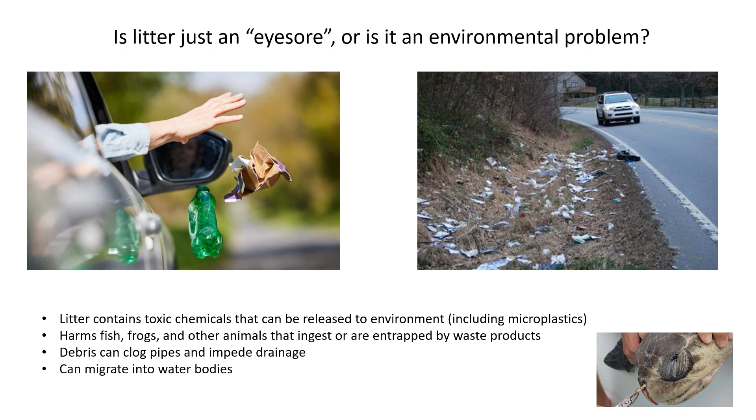And so for all of those reasons, we'd just rather that trash not be floating around in the environment. It's better if we gather it together and dispose of it in a sanitary way that's consistent with best practices in environmental protection. So the first question when we are doing the engineering work of solid waste is, how much is there going to be? And there's a range of how much solid waste people generate on a daily basis.

Here in the United States, we are known for generating a lot of trash. The United States generates a lot of solid waste. A lot of the Gulf countries in the Middle East, which are pretty consumerist societies like ours, also generate a lot of solid waste. And then at the other end of the spectrum, societies that are really rural, like developing countries in Africa, or countries that really emphasize recycling, like Western Europe, would have lower solid waste generation.

Places where they sort recycling, and they're just in the habit of using fabric shopping bags rather than disposable plastic bags. And when you travel abroad, you sometimes notice that paper towels aren't the same thing like they are here in the US. The idea of having a paper towel to wipe down the counter is just absurd to people in a lot of countries where they just use a reusable cloth towel, and so they generate less waste when that's the case.

So what this figure illustrates is, for the population of a city, here on the horizontal axis, the amount of waste that's being generated per day. And this figure is in SI units. So you can see the midpoint of solid waste generation on a per capita basis is 2 kilograms per person per day. And they say that usually it varies from 1.5 to 2.5 kilograms per person per day. And at the low end, you may have as low as 1 kilogram per person per day and as high as 3.

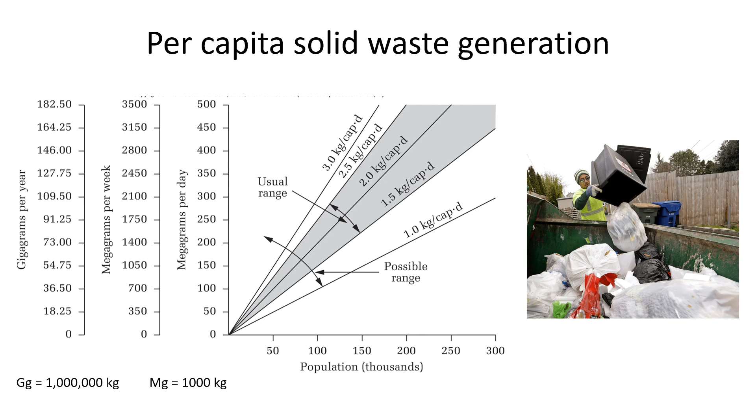So the amount varies, and for problem solving, you'd usually just be given some assumption: assume that the people in your town generate X kilograms or pounds per day. But what can influence that is how closely people are adhering to what's known as the waste management hierarchy. And this is something that comes off of the EPA website, a mindset of what's the best thing that we could do for the environment and for society when we're faced with managing solid waste.

And the best thing that we could do would be to reduce the amount of things we use that generate waste. So for example, sometimes you'll order from Amazon and it'll just come in a very thin plastic bag instead of a big bulky cardboard box.

I think they're starting to make more of an effort to minimize the amount of packaging that goes into shipping their materials. And sometimes they even have what they call frustration-free packaging. And that's where in the past maybe it would be common to have a big bulky, hard to open plastic blister casing, as they call it, for things like batteries or electronic items. Now they're just sealing it up in a very thin, minimalist paper or cardboard coating that doesn't have as much packaging on it. It weighs less.

So the best thing to do is just minimize the amount of waste that is being generated to begin with. And this should sound a lot like the mindset that we brought into pre-treatment for wastewater. The best thing that we can do is reduce the amount of water that's going to the treatment plant to reduce the occurrence of problematic chemicals that may interfere with the treatment process. It's cheaper to prevent the problem than it is to deal with the problem once it's been created.

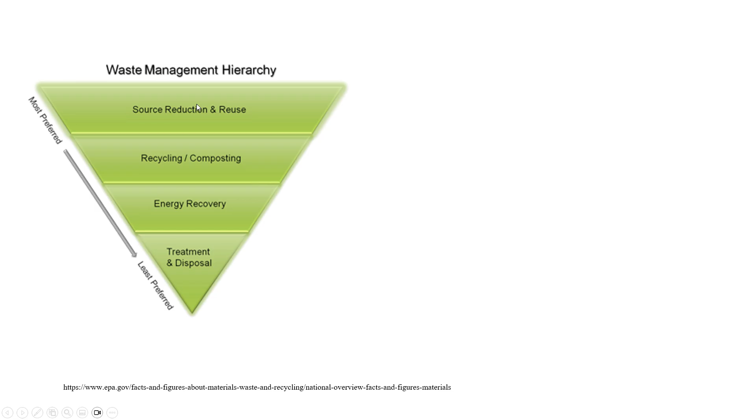So all of those are preferred before we simply throw something away and have no further use for it. So treatment and disposal, you can see, is at the bottom of this list of options. And hopefully the relative areas here indicate the amounts of each of these. It's just qualitative, not an actual true percentage, but it's better if we have a small amount of things being disposed of, and most of the waste that we would otherwise be landfilling can be prevented through using less packaging, reusing items that aren't completely destroyed yet, and so on.

So this is how things are going. The United States is a bigger country now than it was in the 1960s. Every year our population has been going up so far. Because the number of people has been going up, the amount of solid waste being generated has been going up. But it is slowing. The population of the United States in 2018 was a lot higher than you might expect, just based on the relative magnitude of this municipal solid waste that's being generated. But this figure also shows how much of it is going where. So recycling gained popularity over the years. Composting has gained popularity.

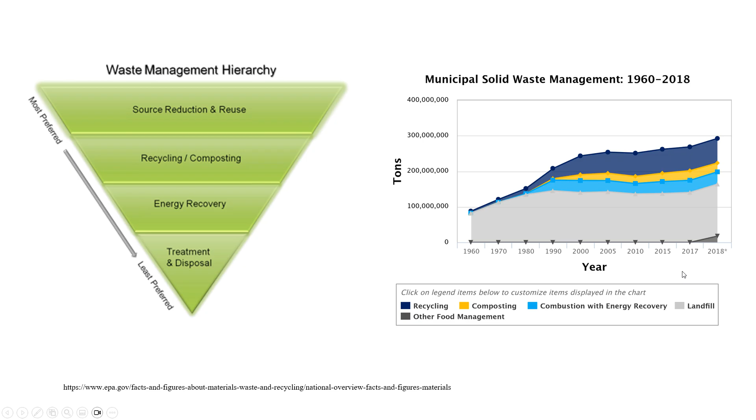Combustion, but still landfilling is the majority of where the solid waste is going. Because it's easiest. You know, I don't like to sort recycling. And actually, they don't do recycling where I live. Some cities have it. I live in a rural area. There's no recycling. So if you want to do recycling, they don't come to your house. You have to track somebody down who will take it.

And it's getting increasingly difficult. We'll talk about that in a minute. But metal has the most residual value out of all the things that can be recycled, and it's still relatively easy to recycle metal. But the other things, you kind of have to almost fight your way into the recycling center to get rid of them.

We sometimes use garbage, trash, solid waste, all those words interchangeably, but they don't mean the same thing. There are technical definitions. So for example, garbage is talking about things that can break down because it's putrescible. That means it's organic. It can rot. So garbage tends to have higher moisture content because it's organic in nature.

And garbage is maybe the most dangerous if we leave it uncollected, because it's going to attract rodents and other vectors that carry diseases. So cockroaches, mice, rats, stray dogs. We don't want them to be spreading disease, and so that's garbage.

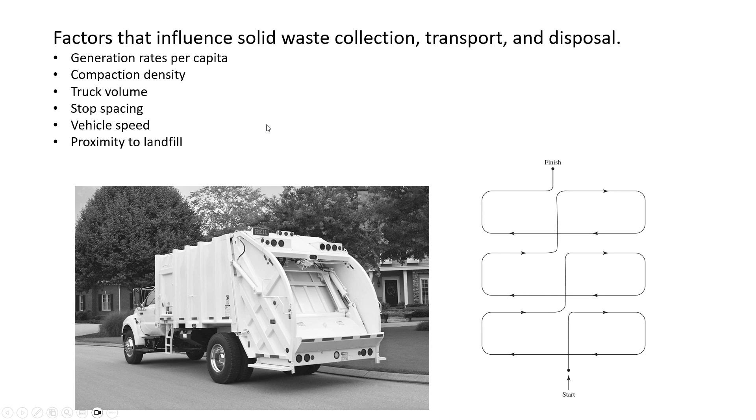Sometimes there's like an intermediate location where they'll dump their trash to be sorted and repacked later, and then they'll go back into the neighborhood and begin collecting again. Taking into account the speed that the truck is driving, any delays that they may encounter, like traffic delays, the amount of time it takes them to unload the waste, and even the number of breaks that they have and how long their breaks are.

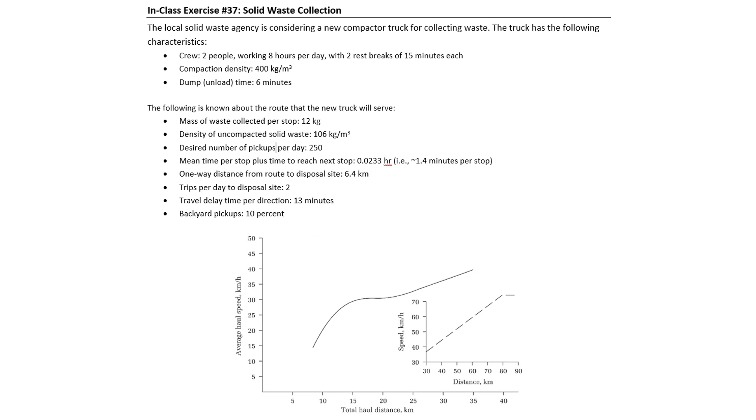So we're going to start off here in this example defining the variables. And so there's the list of variables here. I'd like you to read through the problem statement and assign the number to the variable for each of them. And then on the back side of the paper is where you're going to determine the volume per pickup, the compaction ratio, the volume carried by the truck for each trip to the landfill, and so on.

So I'll pause. Of course, you're free to interact with each other. You don't have to be quiet as you're working on these in-class exercises. You can check your answers and collaborate and everything. But we'll take a few minutes to go through this and then check the calculations together.

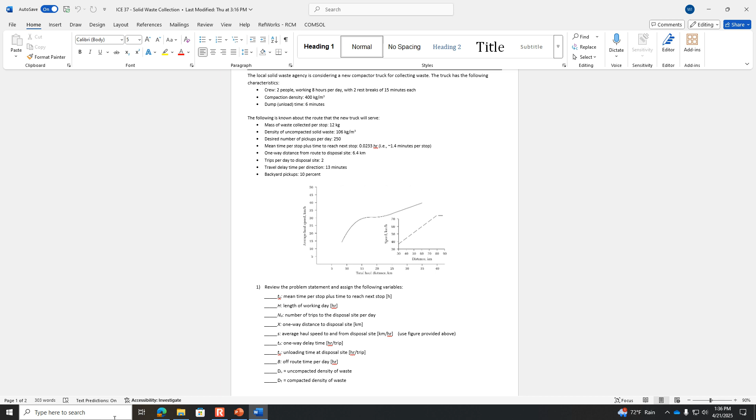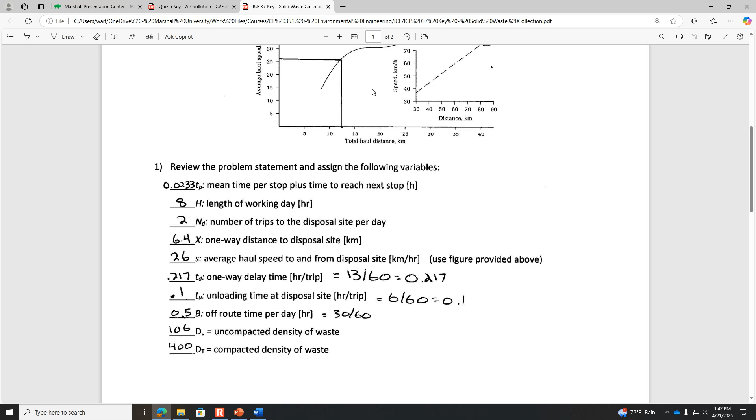Okay, so just setting things up for the equations. Here I've got the variables defined, well, the numbers associated with the variables if you want to double check that. How did you do average haul speed? The average speed? Yeah. I think it's from the figure.

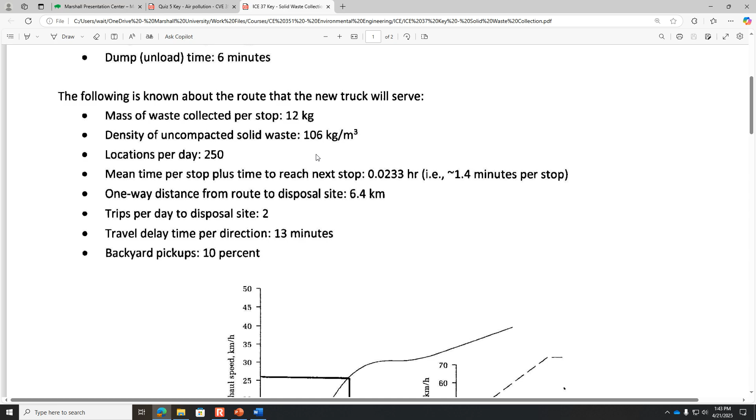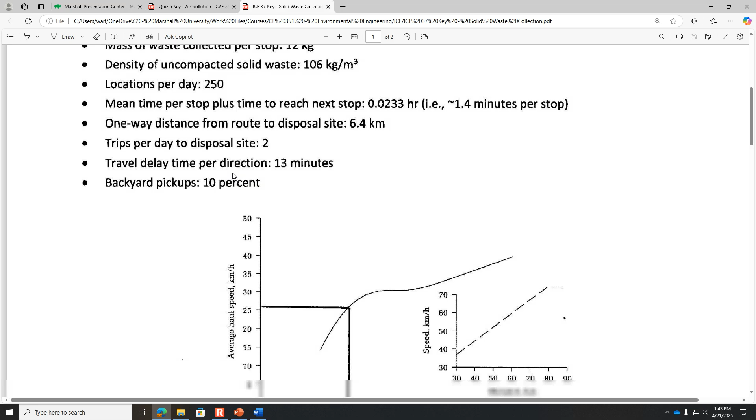So let's see, the distance. Does it say the distance between? Let's see. The total haul distance that they're going round trip would be about 13 kilometers. And so if they're going 13 kilometers, this suggests that their average haul speed would be about 26 kilometers per hour.

Okay, so once we get these, we can calculate, for example, the volume of waste collected per pickup. If it's picking up 12 kilograms of material at each house, which has a density of 106 kilograms per cubic meter, then it's going to be picking up a volume of 0.1132 cubic meters. And then the truck is doing some compaction. The trash inside the truck is being compacted down to a density of 400 kilograms per cubic meter. So the compaction ratio here is 3.7736.

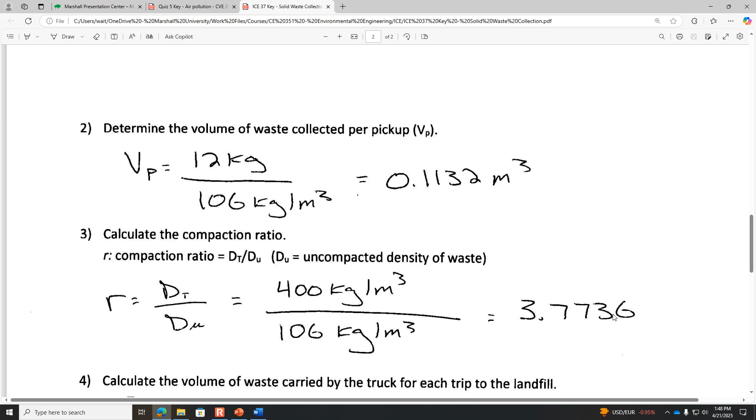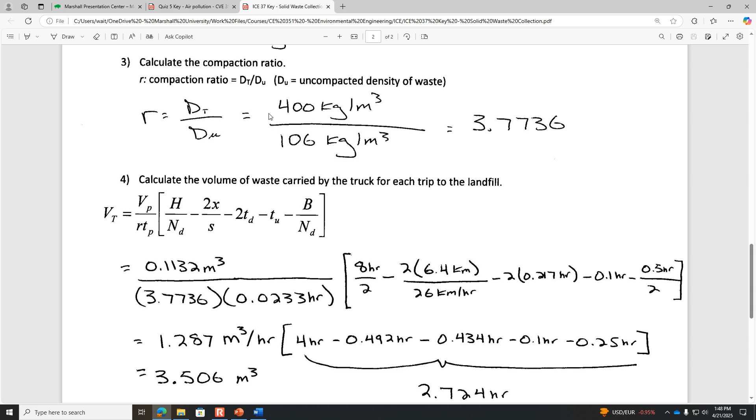And then the volume of waste, this is the big one, carried to the landfill with each trip. Let me leave this up for a few minutes so you can compare. I've included the units here because I think it's helpful to visualize and understand what a formula is telling you. The thing that's in front of the brackets turns into how many cubic meters per hour is going into the truck. And then inside the brackets is an effective amount of time that you're loading the truck.

If you're saying each trip to the landfill starts off as 4 hours worth of work, but then you're subtracting all of these things out, like the time that they're not taking trash in when they're driving to the landfill. They're not taking the trash in when they're on their break or when they're stuck in traffic. All these things are reducing how much time of the 4 hours is being spent gathering trash.

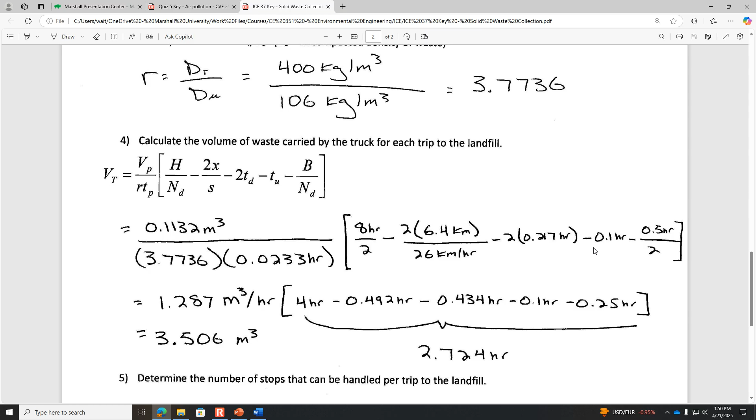So they can take about 117 stops per trip to the landfill. Because if we are basically saying that the truck has a certain known volume, then solving for the number of stops tells us it's 117 stops, and that's less than the 250 per day that's desired. The problem statement initially said that they were going to try and hit 250 houses per day. You wouldn't be able to do it based on how quickly this truck is moving and how long it has to go between places.

And then the last part of it, having to do with the cost, is this truck is going to be collecting enough garbage that they have to pay the landfill $163 per day in tipping fees.